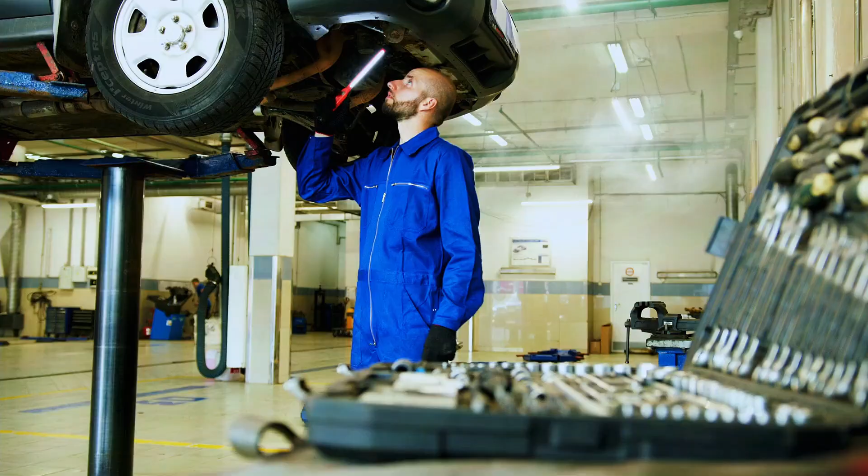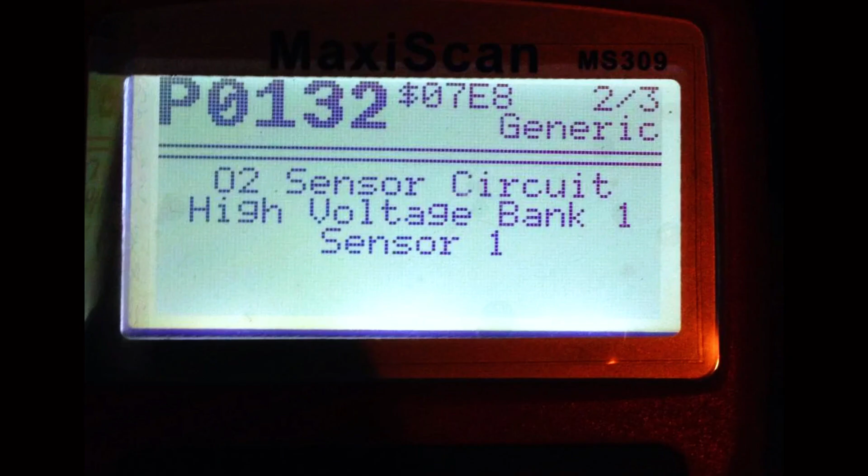Today we're going to tackle a common OBDII code, P0132. If you've scanned your car and got this code, it means there's an issue with the oxygen sensor, specifically bank 1, sensor 1, and it's reporting higher than normal voltage. Stick around and I'll show you how to diagnose and fix it.

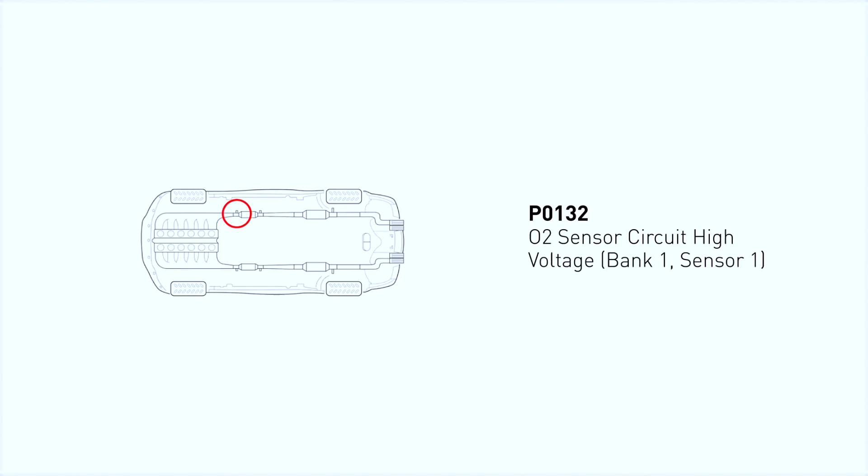Your vehicle has multiple oxygen sensors that monitor the amount of oxygen in the exhaust gas. This helps the engine control the air-fuel ratio. Bank 1, sensor 1 refers to the upstream O2 sensor on the side of the engine where cylinder number 1 is located. The P0132 code indicates that the voltage output of this sensor is too high.

Symptoms include the check engine light, poor fuel economy, rough idling or misfiring, hesitation when accelerating, and a strong exhaust smell.

Tools needed: an OBDII scanner, a multimeter (optional), an oxygen sensor socket, wrench, ratchet and extension, a replacement O2 sensor if necessary, and safety gloves and glasses.

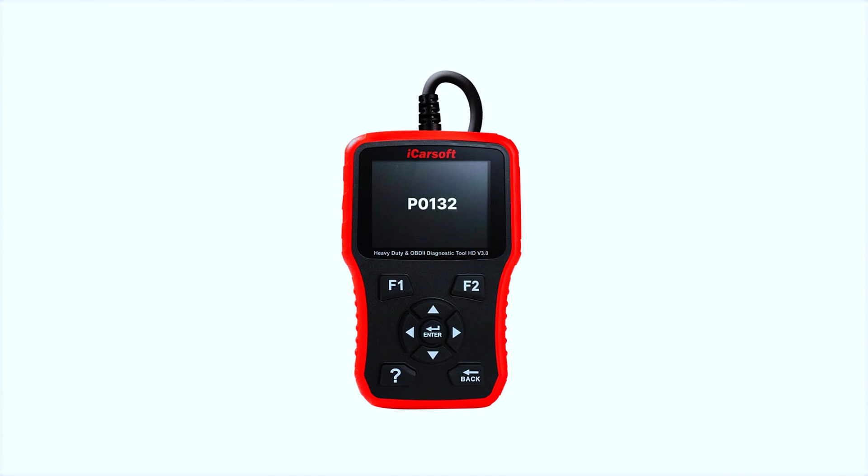First, let's scan for codes. Connect your OBDII scanner to the port under the dashboard and check for any additional codes alongside P0132.

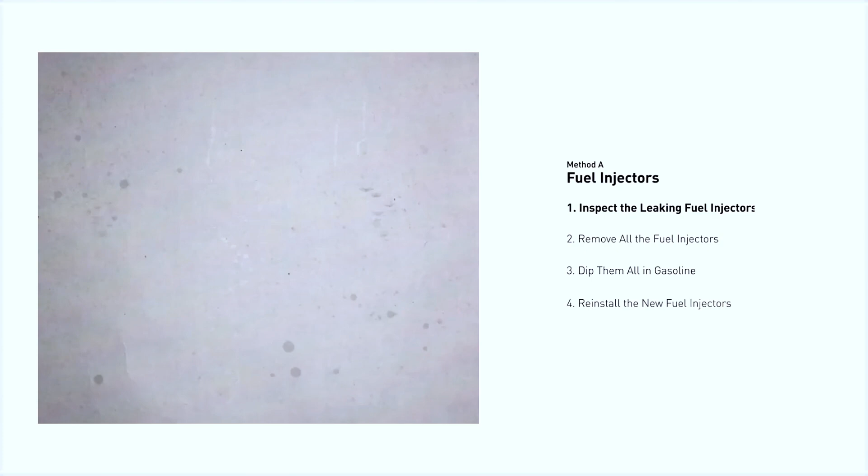First, disconnect the battery for safety. Then locate and remove the fuel rail by unscrewing the bolts holding it in place. Once the fuel rail is off, gently pull out the fuel injectors. Be sure not to damage the O-rings.

Now that the injectors are out, dip them into gasoline to clean off any residue or buildup. Let them soak for a few minutes, then wipe them down.

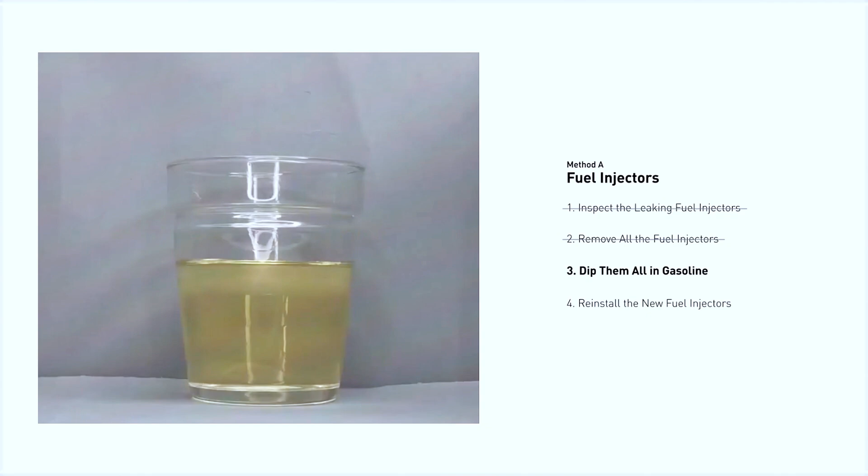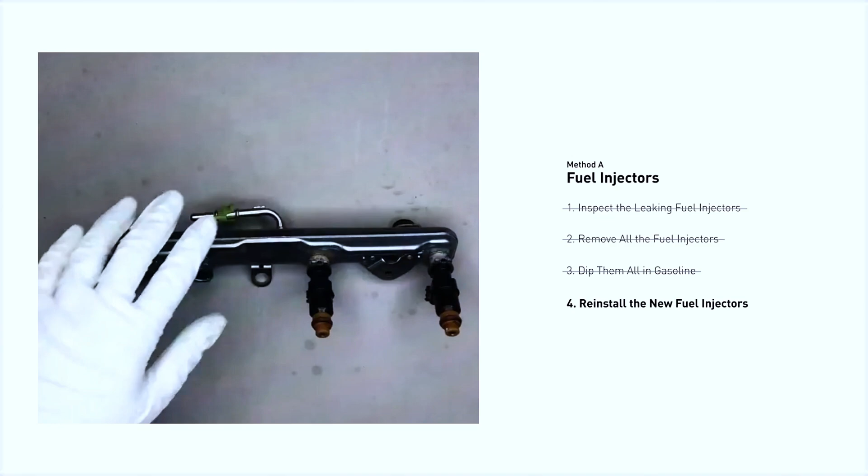If you're installing new injectors, make sure to lubricate the O-rings with a bit of oil. Slide the new injectors into the fuel rail, making sure they're properly seated. Reattach the fuel rail, tighten the bolts, and reconnect the electrical connectors. Double-check everything is secure.

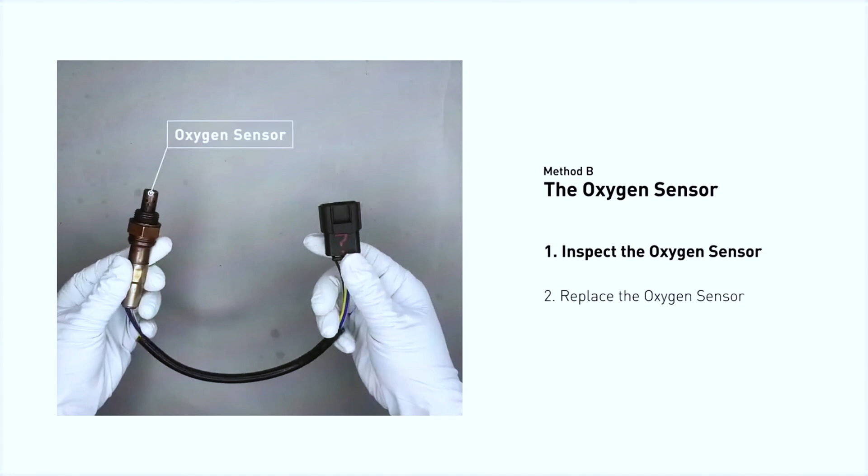Now that we've ruled out wiring, let's go ahead and replace the oxygen sensor. Start by spraying some penetrating oil to help loosen the sensor if it's rusted in place.

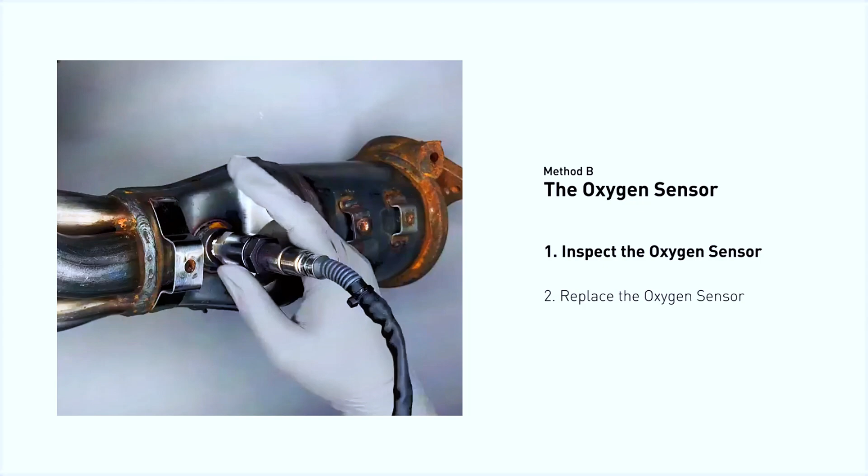Using the oxygen sensor socket, carefully remove the old sensor. Once the old sensor is out, grab the new one and thread it in by hand before tightening it with the socket. Once the sensor is replaced, use your OBDII scanner to clear the P0132 code. Start the car and make sure the check engine light stays off.

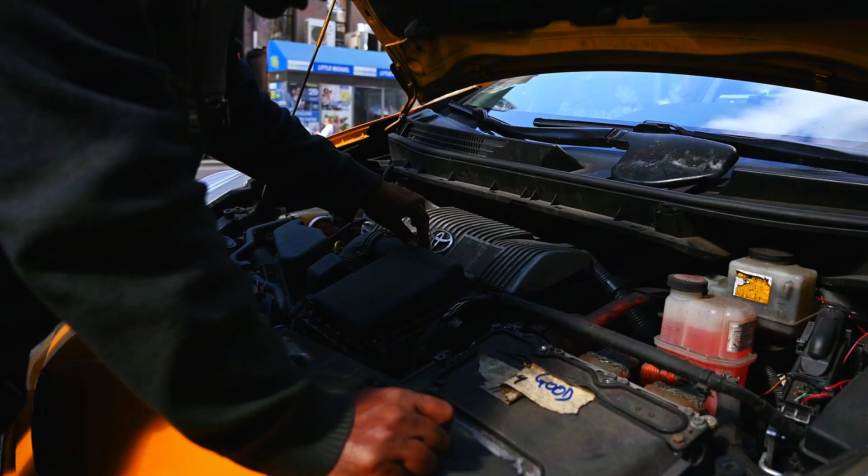And there you have it. That's how you diagnose and fix a P0132 code. Replacing an oxygen sensor is a straightforward job you can do at home with the right tools, saving you a trip to the mechanic.